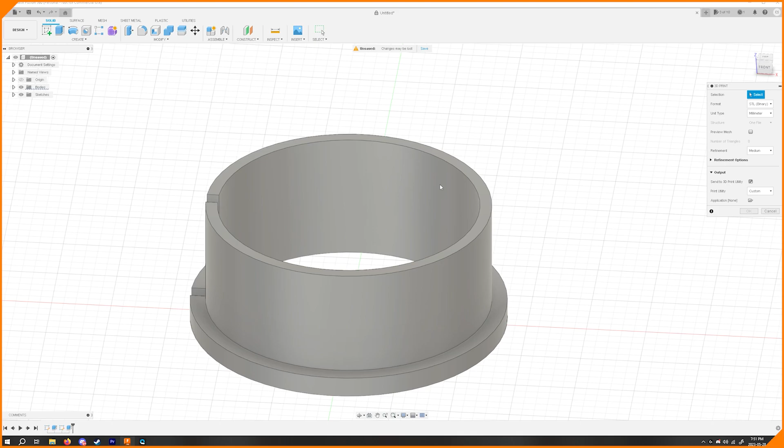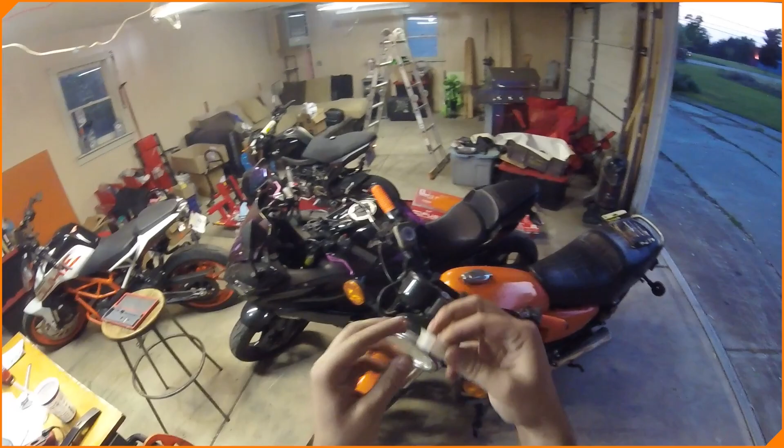Back, YouTube. What you just saw there is me creating one of these. If you've watched the previous video on the XS650, you'll know what this is for. Basically, I want to mount this Triumph mirror to my XS650's bar ends.

I took some measurements and made a piece, which fits really nicely. I don't know if you guys can see that. Then this should get to the inside — oh, maybe not, maybe it's a little too snug on the interior diameter. Yeah, that separates a bit, and it's a little too snug on the inside, which is fine.

Let's do some measurements here. Got my trusted calipers. I designed this to 1.1 inch. It looks like we're at 1.1. No, I lied — there you go. We were not 1.1, we were a lot less. Well, not a lot less, but looking at 1.075.

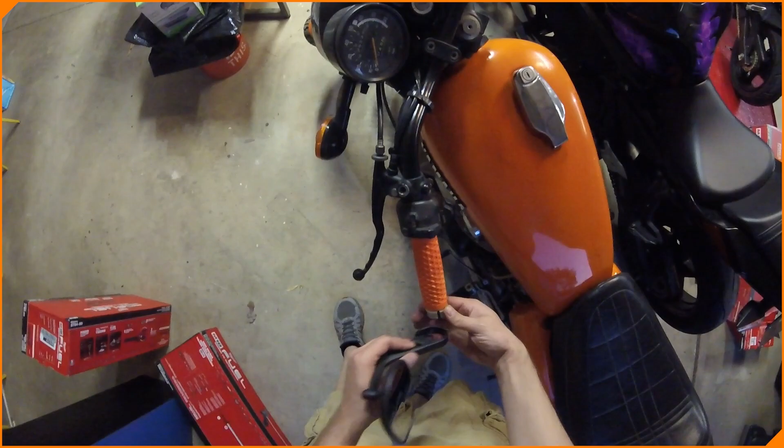So that could be a problem with the program, it could be a problem with the printer — you know, maybe not being the most accurate printer out there, but it's very close. So that's the name of the game here: try to fix stuff, make it right.

So maybe what we do is take this inside diameter — this beautiful thing, the outside fits so nicely — and if we're off, don't stretch it, just feel it. Maybe we offset the outside out another 25 thousandths, 0.025 of an inch outward.

So the inside was 1.1 inch, and it printed at 1.075 inch. Let's verify that number — .075. So we'd have to increase that diameter, so it would be 1.125 inches, and then we'll verify.

The outside seems to be fine, so let's just take a little off the inside. Because this is going to compress down anyways, I think we'll be okay. So we'll come back with revision 2 of this beautiful thing, which also glows in the dark, and we'll see if it fits.

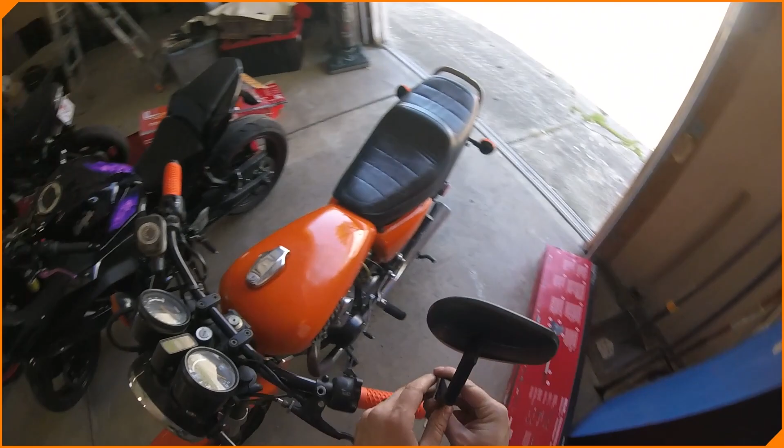Let me grab it and slide it right on. Once that bolt tightens up, this thing does not move whatsoever. So voila — little slip ring. It's been designed, and it's working.

I'm printing it out of very low strength plastic right now to get the sizes right, and then I'll set up my printer to do a higher strength, which will be ABS plastic. I'm using PLA right now — for those of you who 3D print, you'll know the difference and why I need to do ABS. Mostly because it's going to get warm out there on the road, and the PLA could warp, shrink, congest and contort and whatever. But we should be good.

So in 7 minutes, this one will be done. We'll be able to test fit that. And then I will begin the process of doing this out of a nicer material. You gotta figure out what color we have and what we can do with it, but we'll get there. So once that's all done and we're ready, I'm gonna show you guys the final fitment, and we'll call this video done. So it'll probably be a couple days, and we'll get back to that.

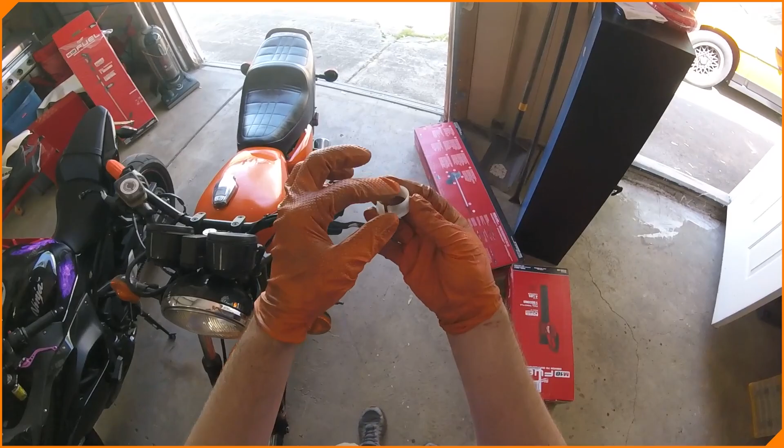Right, YouTube, there's the third rendition. Oop, wrong way, this way, it's gonna go on. Fits perfectly that way. Let's get the mirror out.

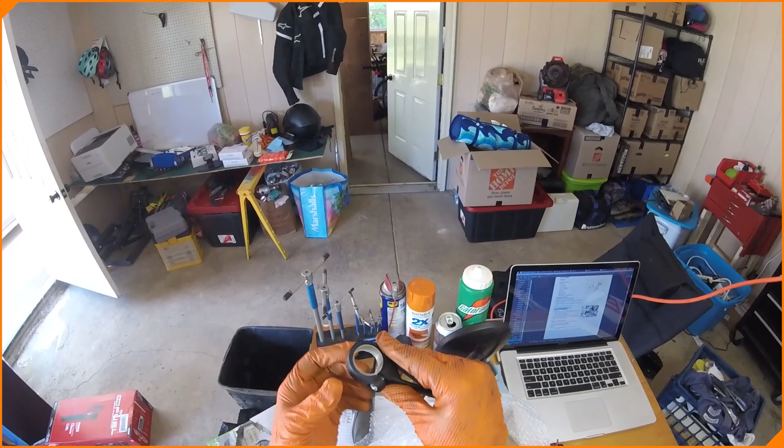Okay. Mirror, oh, it's pretty darn close. That looks good to me.

Now, you gotta put it in the correct way, so this thing can't somehow slide out because there's a little lip in there. Just trying to think of everything I could to keep this in. And then it should wiggle its way on here. Come on. 1, 2. Oh, maybe I need to loosen the bolt in the mirror bolt. Maybe I tightened it a little. Can't remember. It's been 5 minutes.

Let's loosen that up. Oh yeah, that's all it was. And then we will tighten it back down.

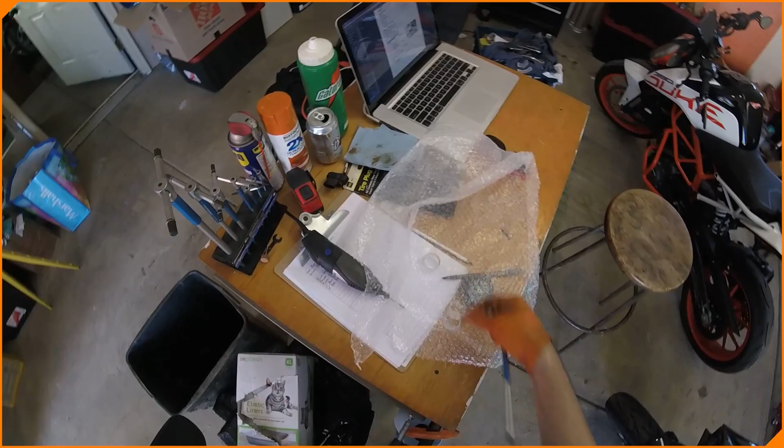Well, that's not right. Is this the right one, or is this one I broke? I grabbed the one I broke. This one.

Fits. There we go. Yeah. Edit that stupidity out. Everybody goes in. Then we have to kind of get this on and over it, which can be a pain because I've already tightened it down once.

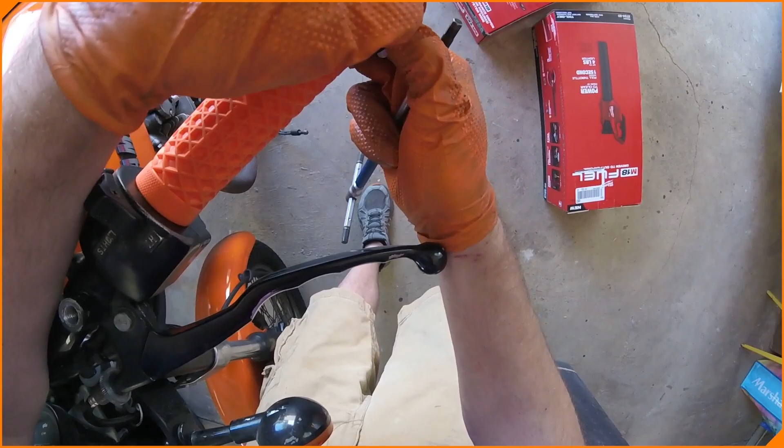Tight. I got too many out here. I gotta stop having... oh my lord, this one. This is the one. I gotta stop grabbing the wrong ones, guys. Okay. Oh yeah, this one's already starting to snug up. Nice. Yeah, I just keep grabbing the wrong ones. So the first one I brought out, it looked right. That's because I bent it and broke it. That was actually the second one. This is the third one.

I'm wondering if it's going to tighten up enough, or if we're SOL here. And I think we're SOL. Wow, that's weird.

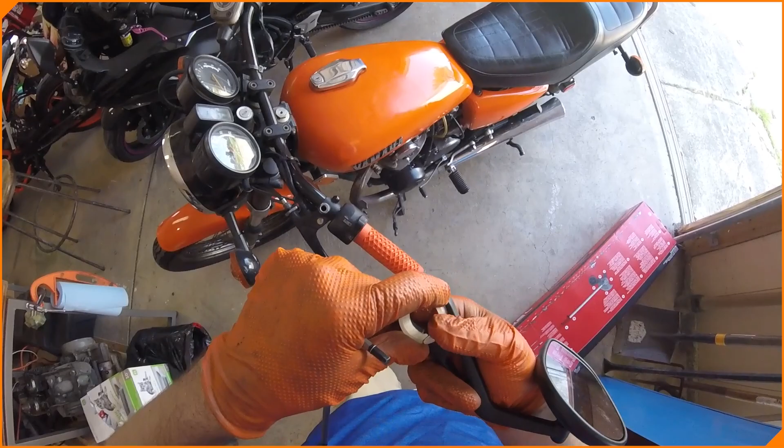We're going to do some more measurements on this, because that seemed to work last time. And now it doesn't want to. I don't want to turn this much more, because it's pretty much bottomed out. Huh, weird. Maybe the printer's off a little. Maybe something's crooked last time.

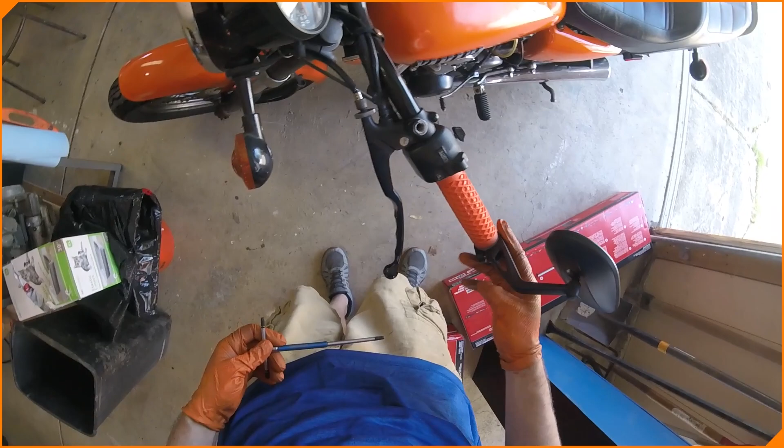Okay. It's pretty tight. Okay, there we go. I don't know what the difference is, but we're going to work on something else. This isn't making me feel confident in this design. Maybe it just needs a little bit more thickness, because that's pretty darn tight.

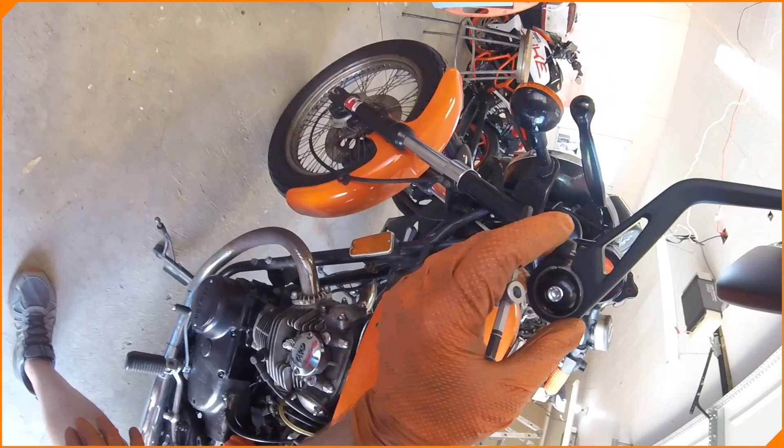What's spinning? So, I mean, it's on there. We'll, I mean, we're talking microns of difference here. So maybe I need to make the plastic ring just a touch thicker, which is fine. We can do that. It's not a problem.

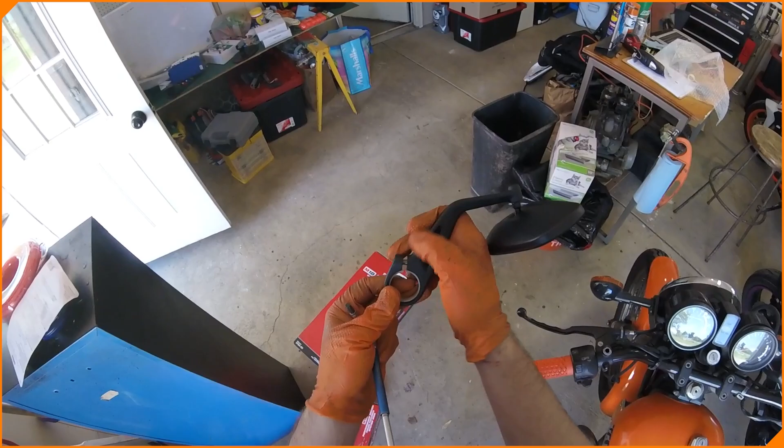So we're going to keep playing with it a little bit. We're going to get it perfect, because I'm not going to ride with it if it's loose at all. And then, you know, I'll probably go through like 4 or 5 more renditions, so I'm not going to bring you guys along for every rendition of this, but we're getting close.

Flag on a truck sounded like a flat tire.

So we're going to keep playing. We're going to get it right. And then we'll show you guys the final rendition of this thing.

I thought this one looked a lot nicer. It feels loose as heck, though. Anyway, like I keep saying, we'll be back with more on this one.